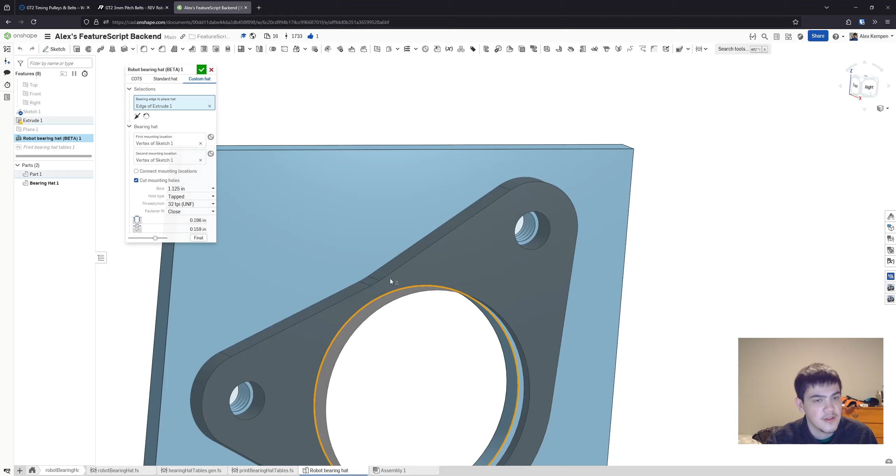So the goal today is to get this fully finished, polished, and ready for release. I would imagine I'll get feedback, because there's always more things you can do and things that can change. I could totally see people asking to configure the diameter of this fillet, or change the wall thickness or things like that. But I think it's easier for now to just release it, and then people can give feedback and we can make changes later as needed.

So the main things I want to do today: final code cleanup. I realized right now this doesn't support tapped holes, which is a little goofy, for sure. So I'll probably try to clean that up as well, and take another look at my standard library hole implementation, making sure I'm doing that correctly and everything is logical and sensical there.

Since the last video, which was like a week and a half ago, I've done some other work with my lookup table module, getting it ready for changes. I've been wanting to use more lookup tables across all of my features, so I've been tweaking the API a little bit and making some changes.

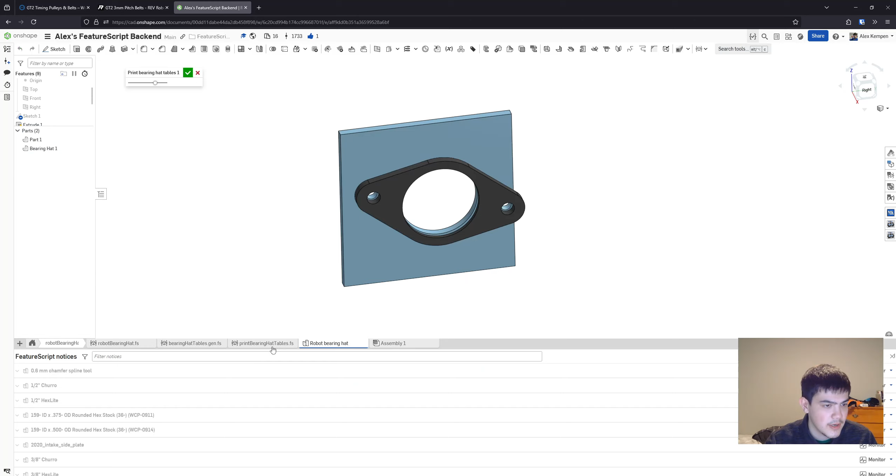Nothing too big. The biggest thing is I added support for basically printing an entire studio. So the generated code now looks, let's see here - if you open this up, the code it prints now includes the FeatureScript version, so it's the full FeatureScript studio. That way you just copy and paste it into an entire studio, and it has the automatically generated file.

That's very similar to the Onshape standard library, how they're generating a lot of their files, although they're obviously not doing it by printing in FeatureScript and copying and pasting. They have an external tool. They do that with all of their enums and things, where it's being generated in code somewhere else, and then they're importing it into the standard library rather than typing them out by hand.

The other change I've made is I used to have that bore type enum - I believe these were specifying the bore type, and then down here inside robot bearing hat there was this get bore values function, which took a bore type as an argument and did a switch statement off of it to get the bore diameter and these values. Now instead we're adding it, defining it relative to the original bore diameter.

You could also, of course, just put outer diameter and C-bore diameter inside the bearing, the bore value as well - you just add them here, and you'd have access to them immediately. So those would both be perfectly fine ways of implementing this feature. It's just what I chose to do while I was developing this.

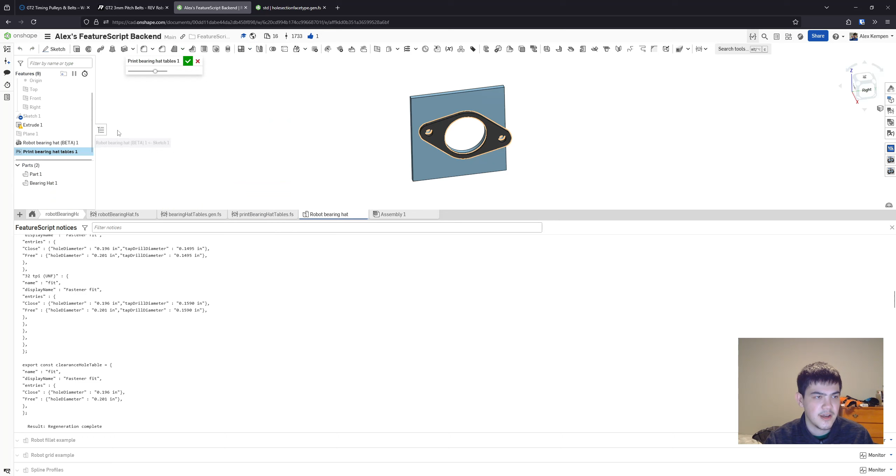But this is just what I'm doing for now. I'm kind of erring on the side of being a little more opinionated, not exposing every option under the sun. If users ask, I can always go back and look at that again. So that's really been the only major code change I've done.

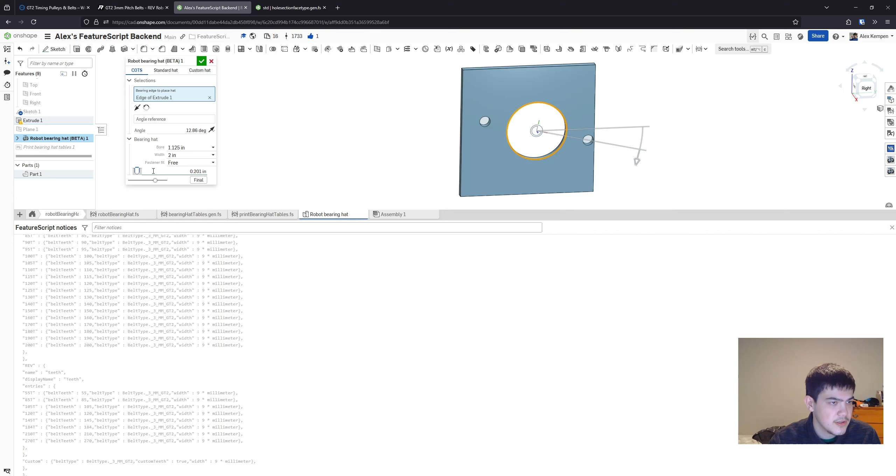So now let's take a look at our last thing here. Currently, I realize after the fact, this doesn't support the tapped holes. I think we actually need another table. Let me look at this again just to refresh my memory a little bit. So we have a bearing hat table or bore table, let's see here.

So this is bore and width - bore, and then you have your width nodes as well. And then otherwise you just have your bore, and then you have a hole, and then there's a clearance hole. So we would just want to update this clearance hole table. Let me make sure this clearance hole table is only used...

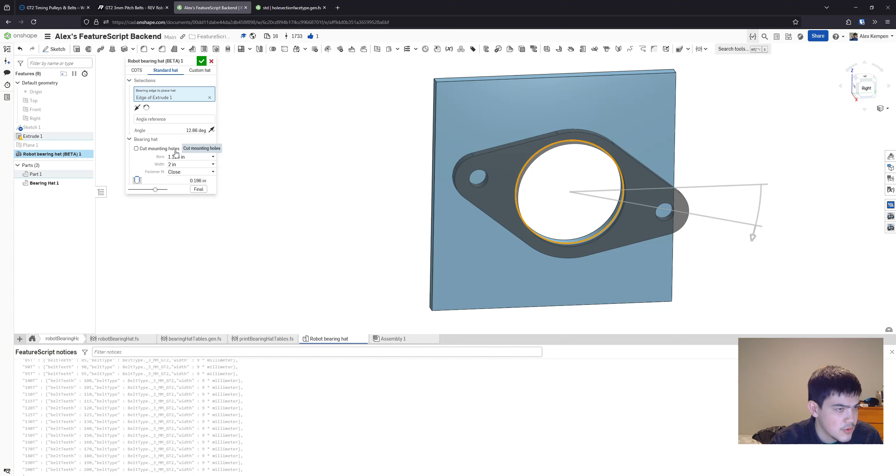Hole table. Let's see when this is being used: use clearance table, which is when it's a COTS, or it's not COTS and we're cutting mounting holes. In the not-COTS case, when we're not cutting mounting holes, you only want the free fit because it's just the hat. So I will need a third lookup table to handle the COTS case, it looks like, which is a little annoying.

If I had realized that last episode, I almost certainly... well, I don't know. There's a lot of things if I had realized I wouldn't have done all of this. But 'in for a penny, in for a pound' has kind of been my catchphrase for the past couple of videos, which is really biting me. But yeah, we'll just go ahead and do it, I guess. It'd be crass to cut it all out now. What have I done? Okay.

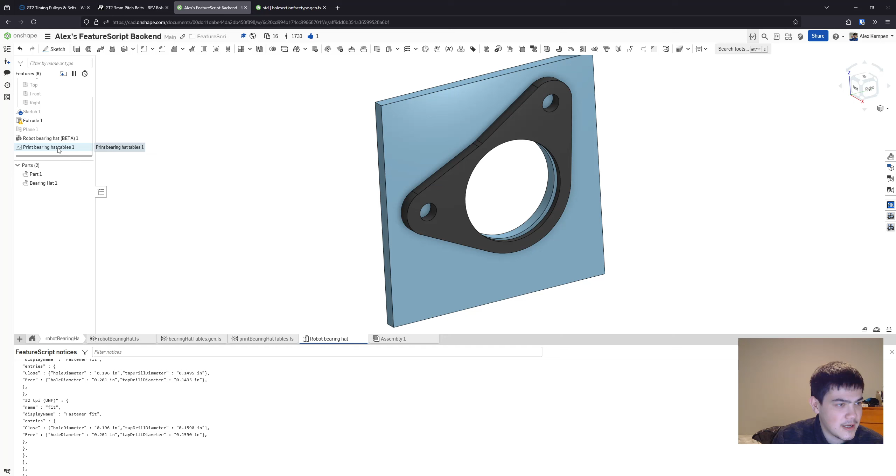So one weird thing with this that I don't love is the Onshape hole tool. They've updated it, and this is something I might have realized but didn't fully internalize. When you're doing a simple hole like this and you're not going through, you don't have a fastener fit. Because if you do have a fastener fit, then it expects a clearance and a tapped hole, and so it complains.

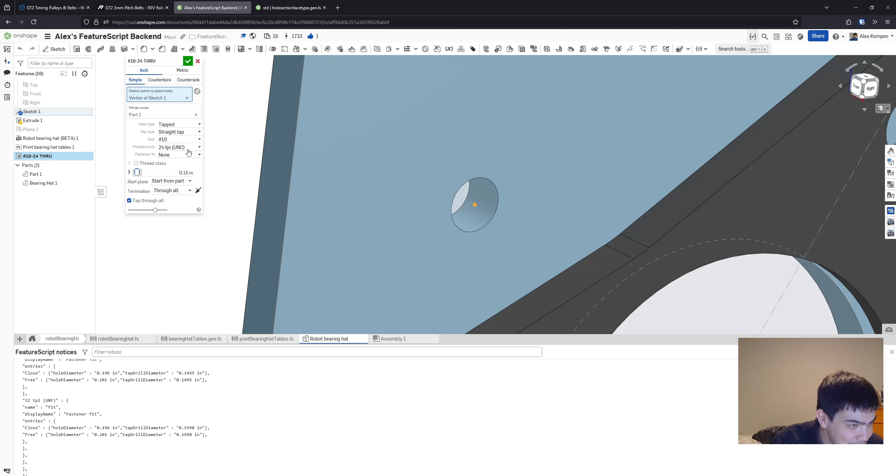So the fastener fit—the weird thing here is, this is a tapped hole, right? Is this a tapped hole? Oh, it's not a tapped hole. Wait, that's so goofy. You set it to tap, you have a straight tap, you set your threads per inch, but then it's just not a tapped hole because you can't make a tapped hole unless you're going through two parts. Wait, that's... okay, that's actually genuinely not great.

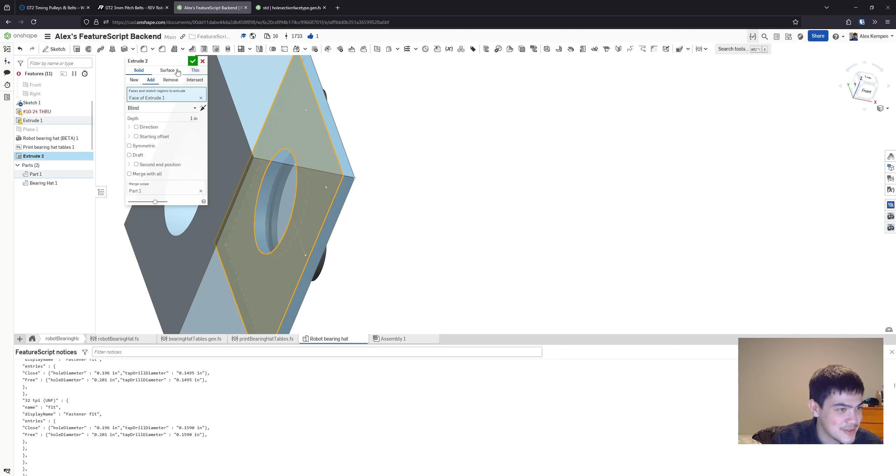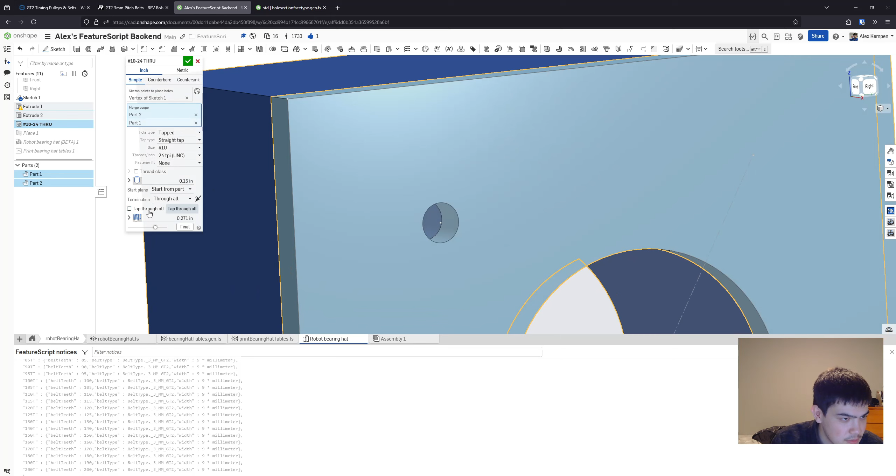Wow, that's pretty bad. Let's just test that real quick. I'll make another extrude here, and then we'll test with our hole. So, well, there's this tap-through-all option, or is this just a weird implementation? So we set our merge scope—oh, that's if you want a partial depth tap. So here, this is still a clearance hole.

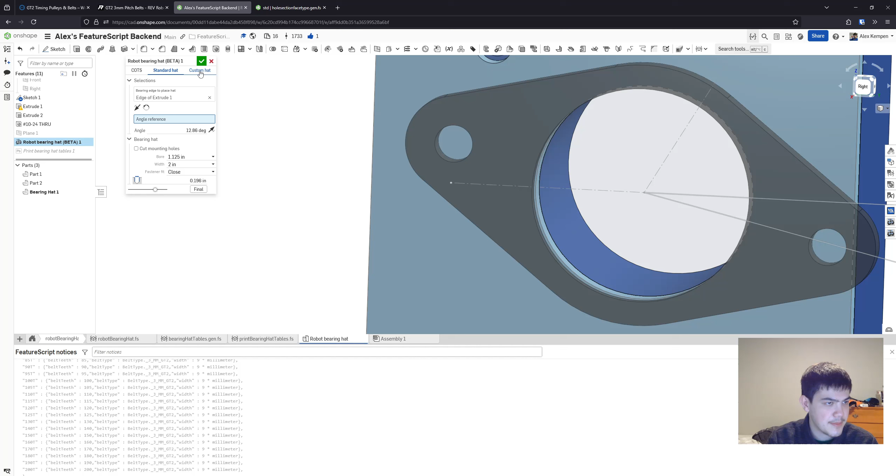And if I set this to close—wait, what? Oh, I don't get it. Okay, sorry, I got confused there because I saw my feature was producing the cosmetic threads. When you do a tapped hole, it's like here—if I set this like this and then make it tapped, I get the cosmetic threads. So I would assume Onshape would also create the cosmetic threads.

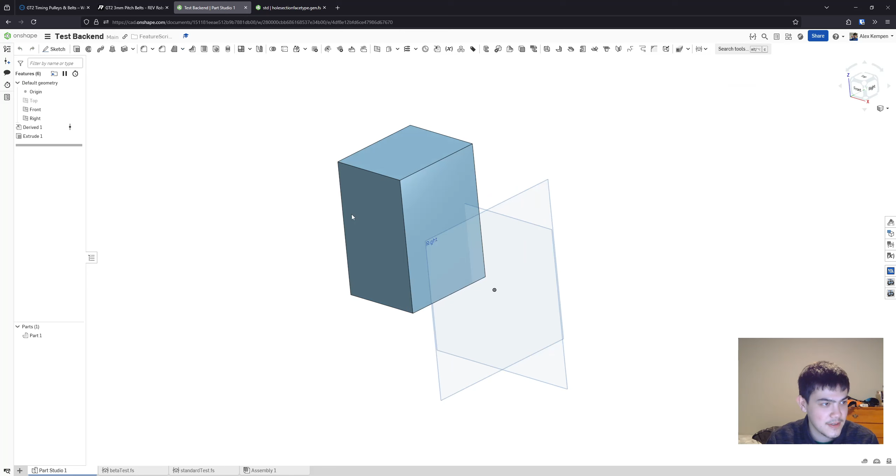But I realized I forgot this document hasn't been updated to the latest version of the Onshape standard library, because that's a relatively new feature, so I don't get to see them. The reason my feature is okay is because I keep my FeatureScript version up to date, using my Robot Manager app—this one over here, which you can get from the App Store for free. It has an action that updates all your feature studios to the latest version automatically. I run that every once in a while to keep documents up to date and keep versions the same, because sometimes, especially when importing from the standard library or copying and pasting code, a version desync will give you errors, which is very annoying.

Anyway, I'm just going to make a test document really quickly, so I have a document on the latest standard library version, just so I can see the behavior for sure. All right, pop one of these, grab a point, extrude. Yep, and then I'll extrude it again.

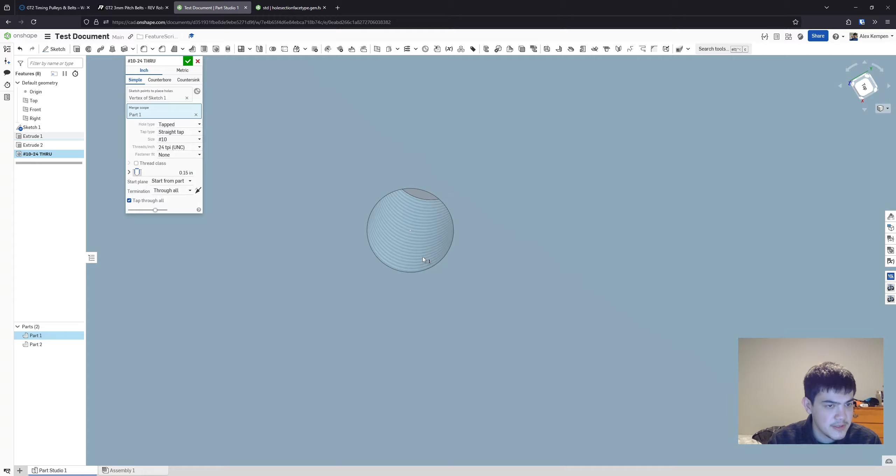New, please. Okay, so if we hit it with a hole feature, yeah, there we see the cosmetic threads. And if I make this a none, yeah, so that's the behavior. The goofy thing with this is this is the hole diameter option, not the tapped hole diameter option, which is strange. That's a little goofy, for sure. That's definitely not what I would expect. But, you know, it's how they implemented it.

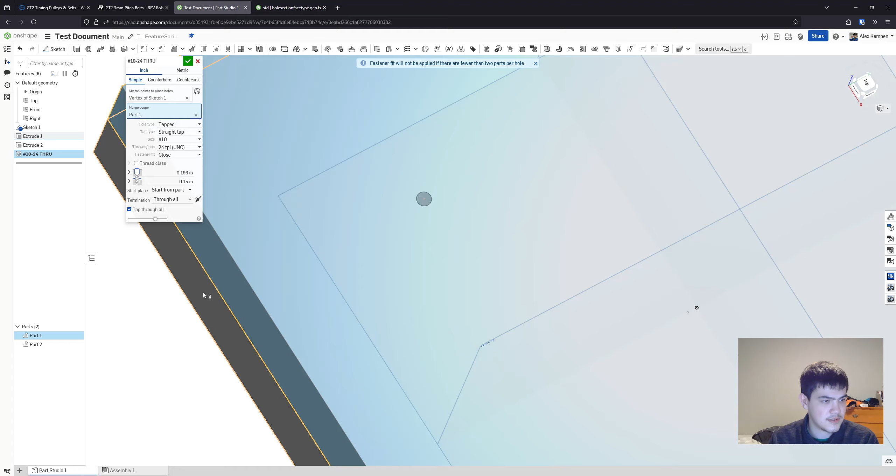Yeah, so if you have a single one, you're only going through a single part and just doing like a regular tapped hole. You don't get the tapped option. You just have the hole diameter. Because, of course, in this situation, I would expect to see this one, and the clearance to go away. But instead, you get the clearance, and it doesn't go away. So it's very strange behavior. I don't know. That's just how Onshape has decided to implement it.

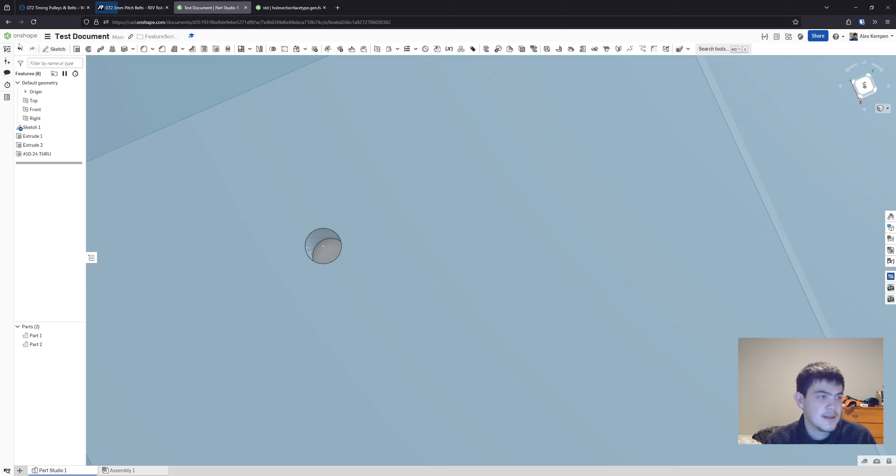And so I'm debating, because I could try showing it and then redirecting to the clearance hole in the back end so everything works out correctly. I don't know what to do. I guess I'll probably stick with what Onshape has to be consistent with the standard library and match their behavior. But I do think it's goofy, and I definitely don't like it. So wag my finger a little bit, but it is what it is. Okay. So that's fine.

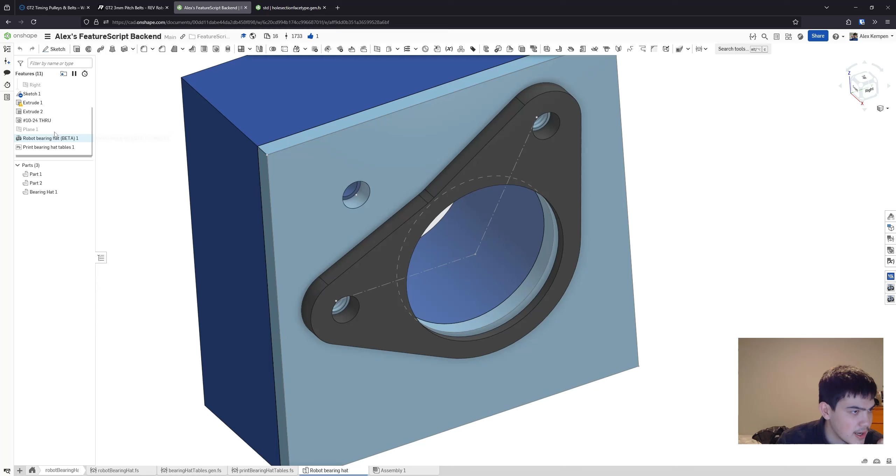Okay, so we need to do a, what is my hole table actually? Is that just what I need? Clearance, tapped, and then fit or thread? Yeah, although, let's see, the problem there is just we're showing the extra parameter. Does it actually have too much UI? So for a simple tapped hole, I would expect not to have a fastener fit, right? Because you don't have a fastener fit for thread tapping. You just have your 24, 32, UNC and UNF.

Okay, so I'll need a version of this. Const single tapped. Yeah, okay, so I just need this, and then I just need this guy here, right? And actually I'm thinking now, I bet I can use some of my new set next utilities, because I just need a thread node without the fits added, right? So I just need this option here and then terminating here, so I need the nodes up to here basically. So let's try and get that.

So what I'm gonna do is I'm gonna make my hole node. Or wait, hold on, what's going on? So I have my fit node, which allows me, yeah, so I still need hole type. Okay, so let's do const single hole node equals hole node, right? And so this will create a copy actually, because in Onshape, some languages have the concept of mutation. Actually, Onshape does support it a little bit, right?

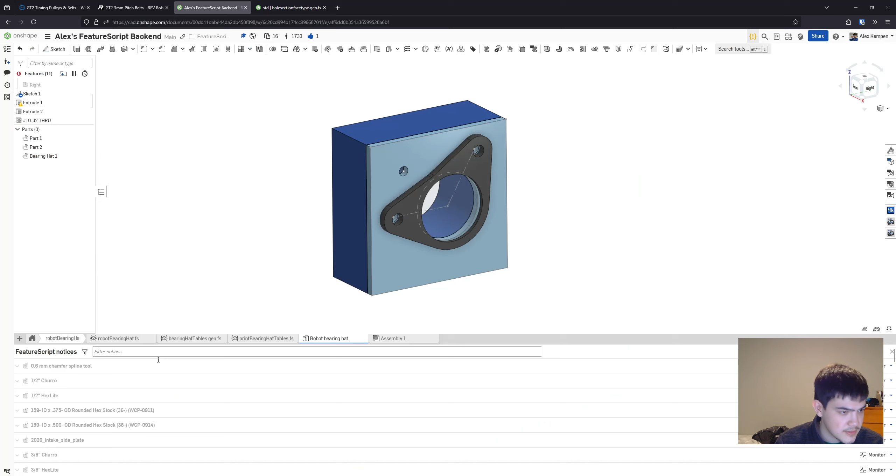Yeah, so if we go look at the code now. Oh, it's erroring. It's not regenerating properly. That's not amazing. Lookup value. Oh, right. I don't have an overload for just the name, so I'll make that real quick, because value is optional. Yeah, and it auto-completes. And you'll notice I've updated this a little bit so that they now take more maps as parameters, just because maps are a little more variable. Although for lookup value, I found I like having the overloads broken out because it makes the syntax a little more concise.

So just to recap, we have our hole node, the clearance option will always map to the fit node, so that'll build out your close to free option. But then tapped, here we're mapping tap to the thread node, so that's getting added on. So this option here, when we call that, will become the thread node, and the other one, we're mapping tapped to our single hole thread node, so we get our different nodes depending on which table we're building.

And so if we look down here, we can see we have our standard hole table. Here tapped builds out into our pitch, and then we have our fits on top of that. And if we look down here at our single hole table, hole type, clearance, and then tapped gets built out into just our pitch. So we don't have the thread fits there. Yeah. So that works, and it's probably sufficient.

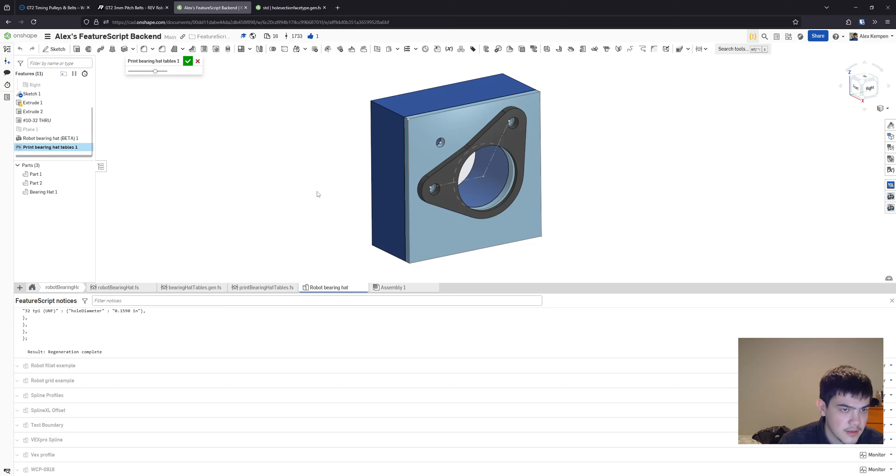Nice. And then we make sure this is copying correctly. If the path changes, we get the lookup info. Has clearance is always just going to look at whether we're tapped or not. And then hole diameter, we get that. Yeah, it always expects a hole diameter, and then if we have a tap drill diameter, that also gets set. And so here we just have the hole diameter, so it won't set that. So theoretically, this just works.

Let's take a look. So COTS, right? This is the one we changed. So we see we now have our tapped holes. And we see it's complaining about parameters that have been overridden, right? But I do see my tapped hole, so we're happy with that. And then I do see my tap drill is still here, which is not right. That's not updating. Okay, use clearance tables with one argument is not found. So that's not right.

Get active path. What is this used for? It's just used for the editing logic. Yeah, I don't love this function because it's already done here, right? I guess we'll just do this. Path equals get dot path. Yeah, we can just do that. Right, and this also gets the table, which is slightly inefficient, but like whatever, it's editing logic. It's not like a performance problem at all.

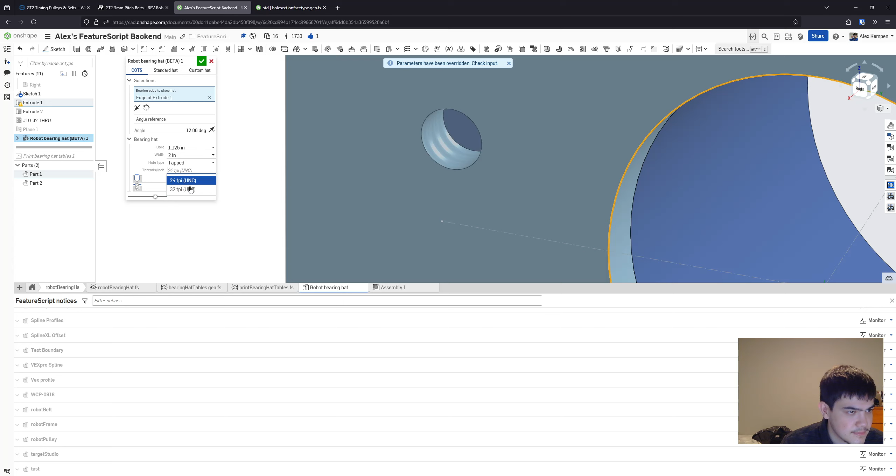Yeah, so if you change this now, that does that, which is good. So it updates that as we want. And the hole is still tapped. Okay, and then we come over here, right? We can do our fastener fit. That still works. And then we can change our tapped as well. And if we don't cut the mounting hole, we get close or free, which is correct.

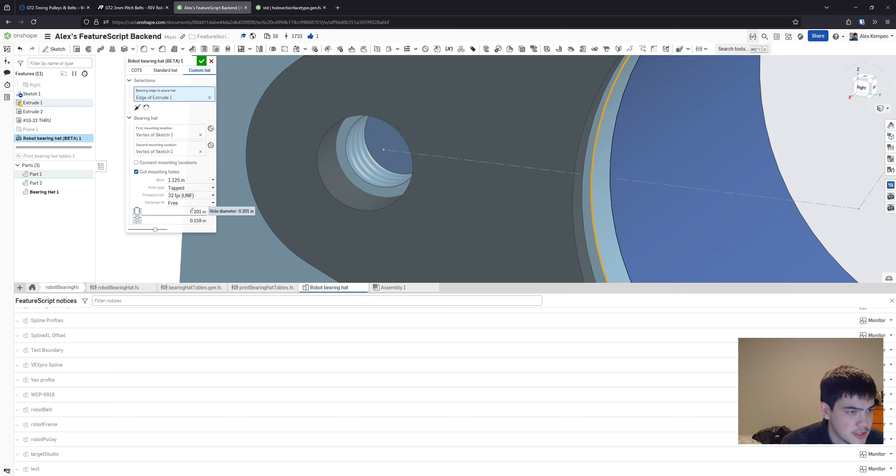Nice. And then here, right, same thing, I would imagine. Don't cut mounting holes, you get close or free. If you do cut mounting holes, you get your tapped options, and that all appears to be working. Cool. Yeah, so this appears to be right. 24. Yeah, is that right? Smaller, bigger. I'm noticing the diameter changes. 0.1495, 0.159. Let's see here.

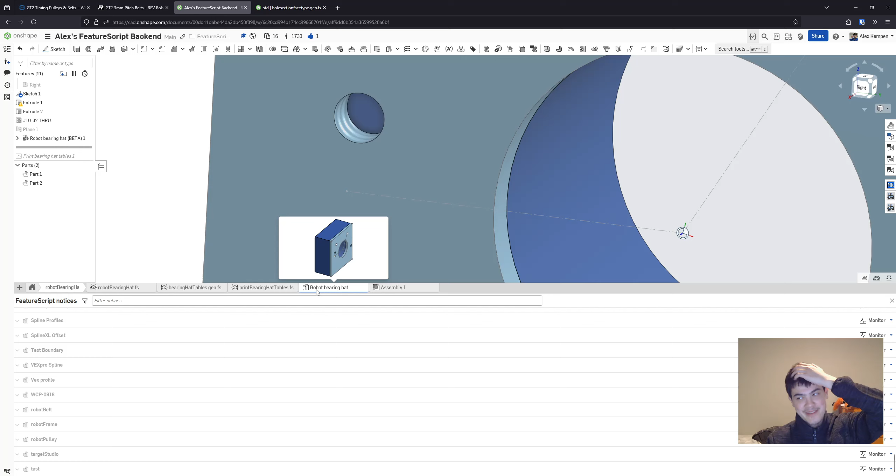Okay, yeah, so it's still using the tap drill diameter. And if that's the case, then... Okay, if you're just going to use the tap drill diameter, then maybe we should just use the tap drill diameter. Is what I'm thinking. You know? And we'll just say... Because at this point, it's just too easy to use that, I think. Well... Let me think. Or well, let me actually look at my logic, I guess.

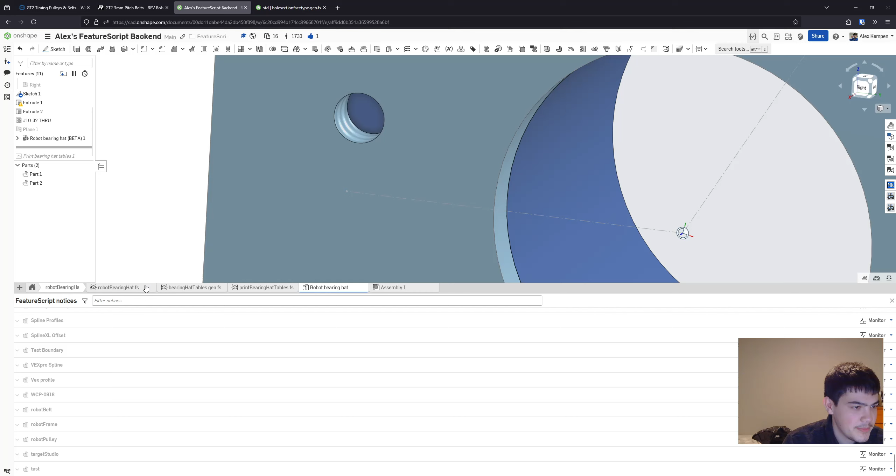So yeah, so has clearance is not getting set correctly. So it is a tapped hole, so it shouldn't have a clearance. Oh, I guess I suppose I see why it is easier.

Do I want to do that? I mean, this could just be getHoleLookupInfo(path). Although this will do weird things if... we'll just roll with it. It's fine, it doesn't matter. I was just thinking if you store the call, then technically you can avoid having to run the lookup hole info twice, right? Because it gets called once in here, and then if it passes, it gets called again immediately, which is a little goofy. But I like this pattern of just checking, so I'm not gonna worry about it.

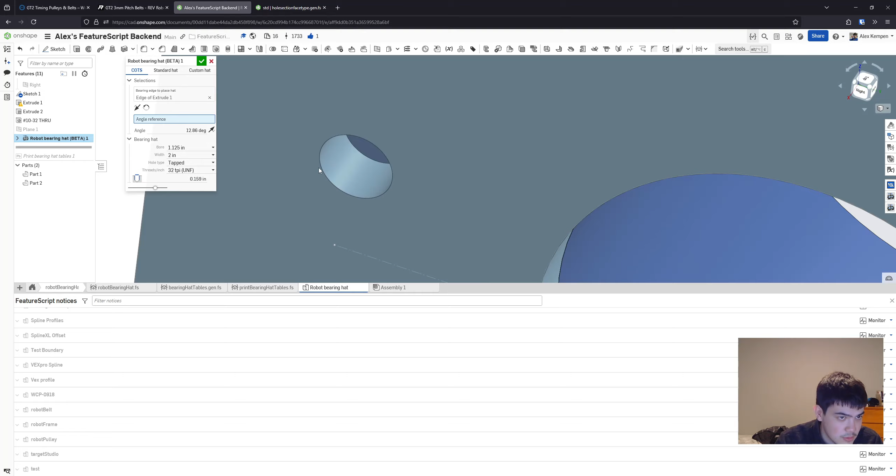So now when we change to COTS, we get that, and that happens regardless of clearance or tapped, and then if we come back, it updates properly. So that's good, we like that. Okay, and then, oh, I see, so this is not a tapped hole currently, probably because it's using that is tapped. Really?

Okay. Well, yeah, because the thing is, if I wanted to hide the hole diameter and show the tap diameter, I would need another parameter to handle that, right? And then I would have to rebind them properly. And that is a lot of rebinding for my taste. That would be quite a bit. So path.size equals number 10, path type is straight tap.

Okay, yeah, so I wanted to update this to go through both faces. So I'll go ahead and start doing that. Basically I want to have one hole operation that cuts both holes, because the hole obviously supports that. As opposed to sketching the mounting holes and extruding them through one and then using the hole tool for the other. If you're gonna use the hole tool, you may as well use it for both.

So that means here, right? Here is where we extrude. We create the bearing hat base and then we sketch out the mounting hole faces and cut them. Actually, I'll just delete this code because I know I won't need it. I could cut the bearing hole using hole as well, but this is just easier. And people shouldn't need attributes for that because it's a big counterbore anyway.

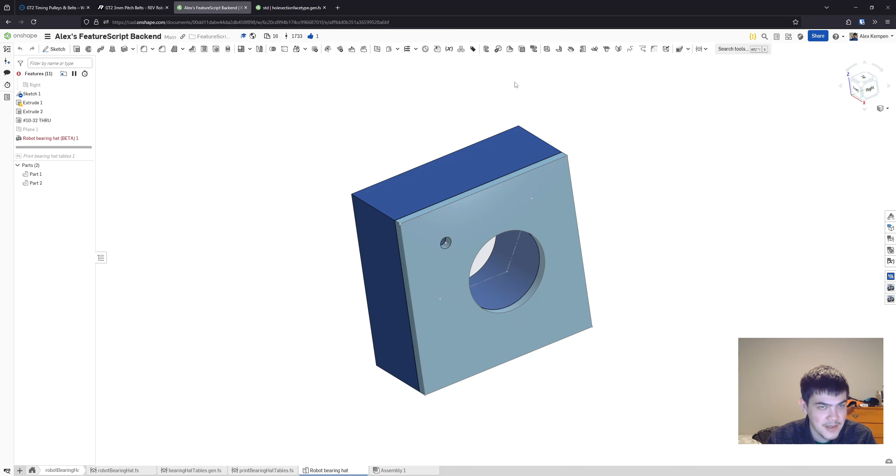And then tap drill diameter is always going to be the tap drill diameter. And then major diameter is just chilling there. I suspect major diameter just doesn't need to be set, or it can be set to an arbitrary value as long as it's present, because Onshape just has a bug in their API. But one thing at a time.

Okay, so we did that. Yep, so we added parameters. What did I add? Circle plane and I think locations. Yeah, it looks like I usually pass circle plane before locations, so that's probably the correct order.

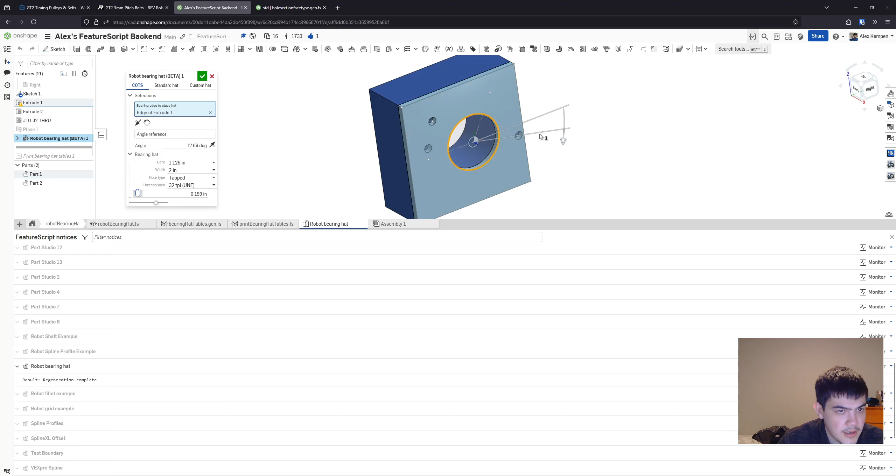Okay, let's see what we got. So we got our standard hole. It's complaining about parameters being overridden, which is not amazing, but one thing at a time. So custom hole.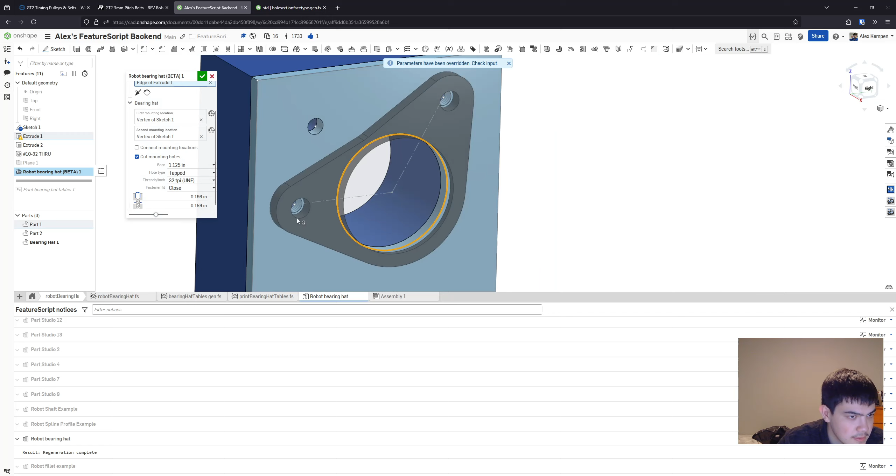Okay, let's actually verify. So if my fit changes, that works. If I change to this, that works. And if I do a clearance hole, that goes through both, and it's close, and it's free. Okay, so that works, and it's the same for standard hat and custom hat.

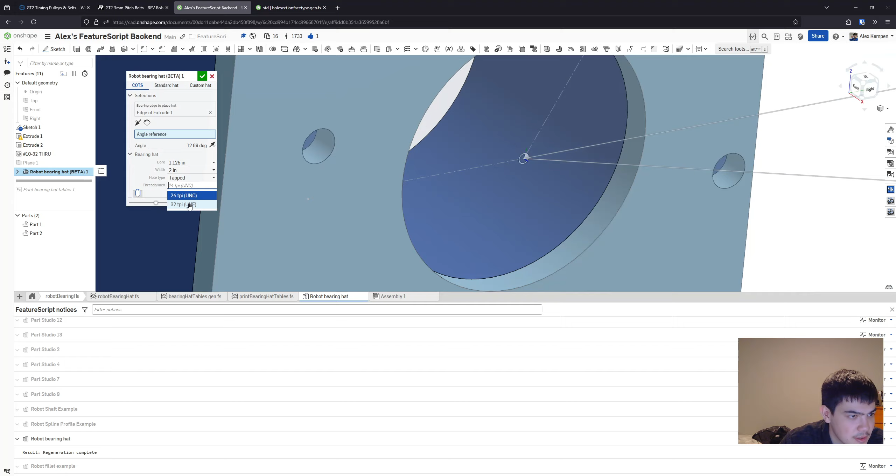And then COTS, if I do a clearance hole, I can do close or free. And if I do a tapped hole, I can do tapped or clearance. Although it's not actually getting marked as tapped, so that's not good. So we need to fix that part.

So let's see what we got. Mounting holes. Okay, so I assume this is a problem with this. Should also be checking attributes, I suppose. I'll do that shortly here. Has clearance. This might be wrong here.

Path that fit. Oh yeah, so if it's going through multiple parts, yeah, so it's going through multiple parts when you have a bearing hat and we're also cutting mounting holes. Right, I don't actually need, well, I'll keep this for a second, but I don't think I need it. Technically you have multiple parts if we ever allowed the scope to cut through multiple things, but like one thing at a time.

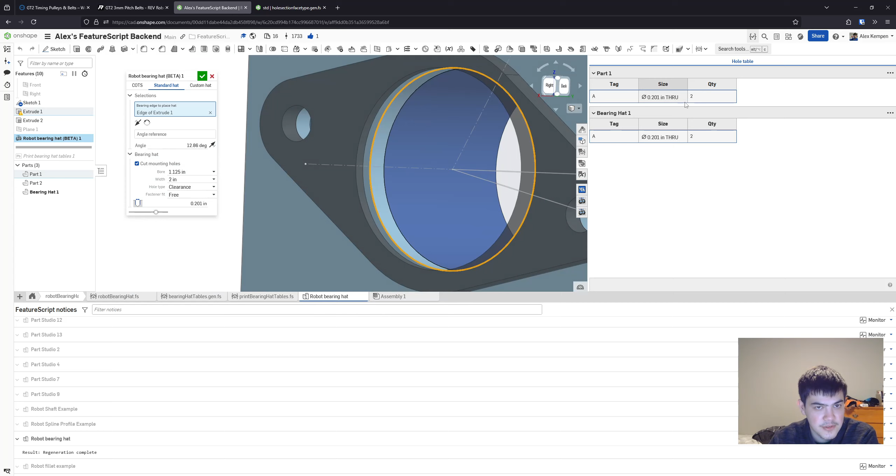Okay, so it's still not tapped, so that's not amazing. Let's verify this, I guess. So let's check our hole table. Okay, and I'll get rid of this just so I don't have conflicting UI. Okay, so yeah, so we got our holes, right, which is cool. So those are both 0.201 right now, which is fine. Now I make them close, that works.

Okay, so now if we make them tapped, okay, it is not having a good time. That's not what you love to see. Table title, oh boy. Okay, so we're getting an if statement. Condition must be Boolean, it's undefined. So let's take a look.

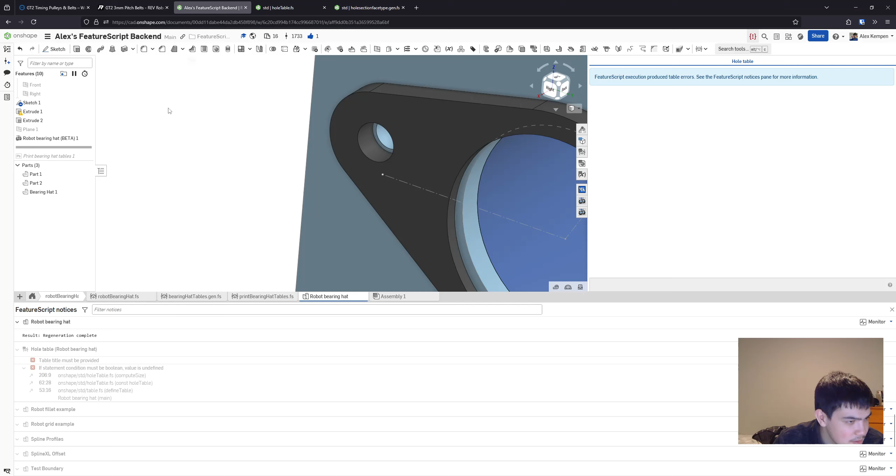Is tapped through. Okay, so it's not really. What line? 206? Okay, yeah, so it's complaining its tap through is not set, which is a little surprising for sure.

Must be Boolean, value is undefined. Okay, is there an is tapped through? Okay, so just like that, we're back to like checking through v2. No. Oh boy.

Okay, there is only one is tap through parameter. Because we definitely don't want to have to set all of these things, that's for sure. Because my life is too short. And I will cry. Tip angle style. Okay, so it is being set, right? Like it's being passed.

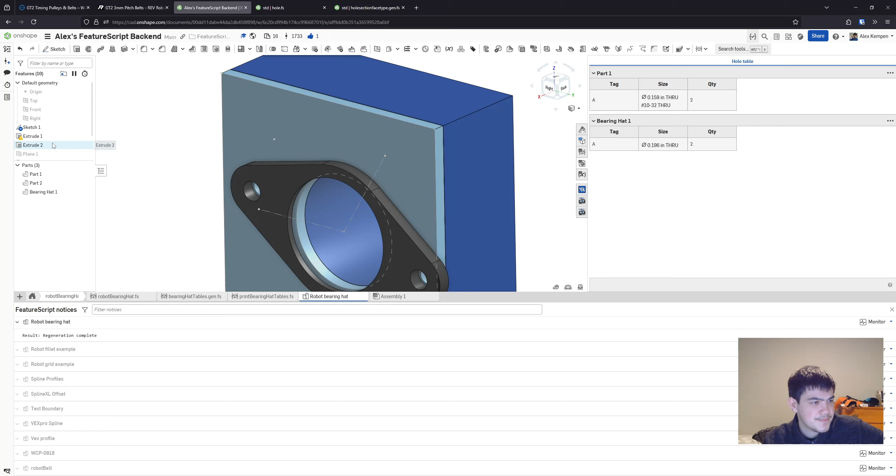Let's try this. Okay, so that brings us back to that. Fit is wrong, really? Why can't I pass a fit? I mean, these attributes are correct, right?

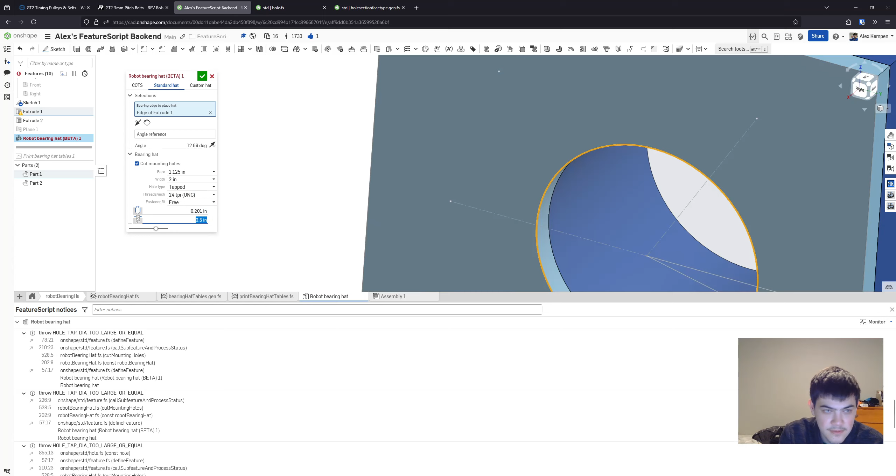Which makes me want to conclude, right, and if I do like 0.5, whoop, 0.15, sorry. Right, so that works, right. So like that part is all fine. Parameters has been overridden is obviously wrong, but one thing at a time, right?

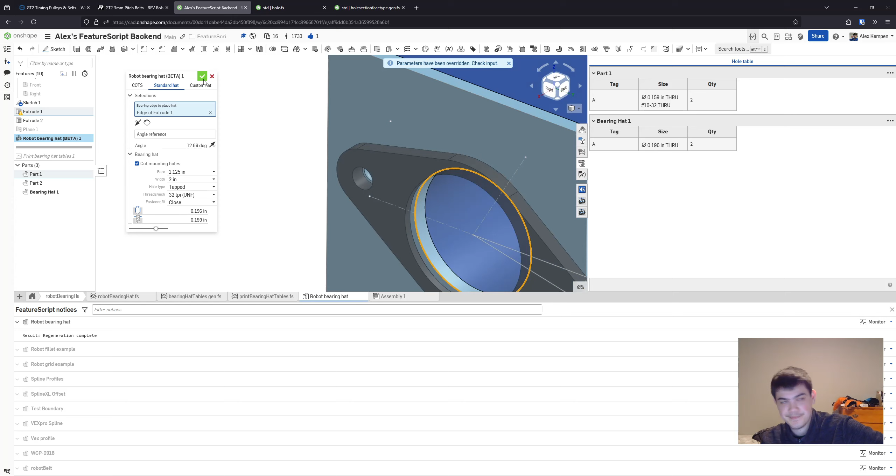Okay, so that's surprising, or I mean that just works, right? So I might have been wrong about the fit needing to be set to none, or maybe it just doesn't matter. Right, and so here we're not setting like the hole attributes, I think, is the problem. So...

Yeah, so has clearance will be false. Will be false when you have multiple parts. Let's see here. So this is wrong when...

Yeah, so there's times where you have where you don't have clearance, but it's not tapped, because has clearance is being used to hide and show that tap parameter. So this is wrong. And so we should not be setting it to tapped if we're using a single hole table. Else if use single hole table. And really we should be checking if the path is tapped.

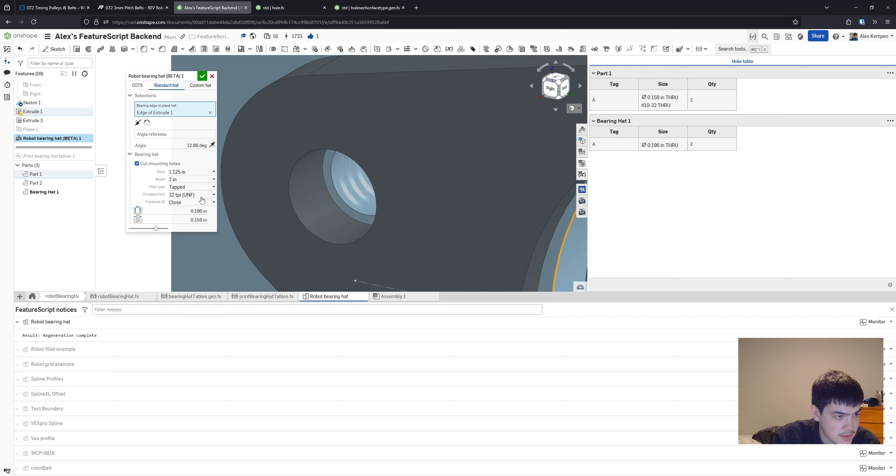Okay, so then we can do our standard hole. So I see that is correct. Right, we can change that. We can change that. Everything seems to be updating correctly. All right, if I change to clearance, I get a clearance hole, and I can

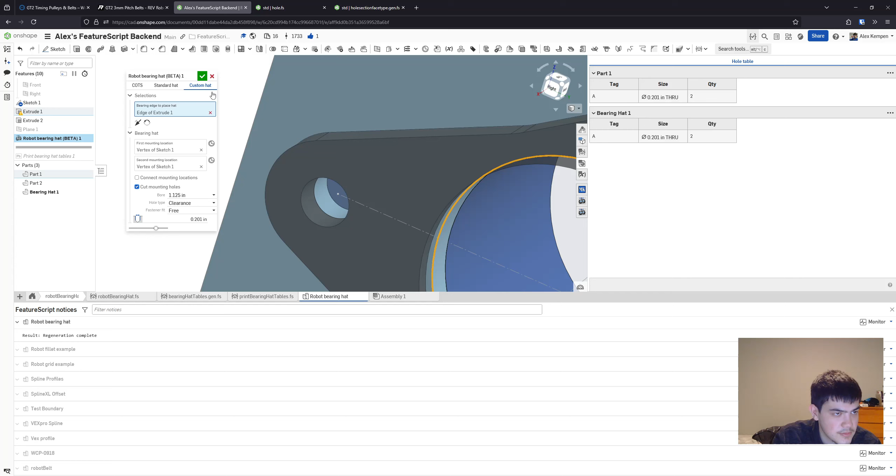still change the fits. Okay, if I don't have a mounting hole, I still have a mounting hole, which is wrong. Okay, yeah, because if we're not cutting the mounting holes, I'm still passing the scope, so we need to fix that.

Okay, so I'm going to rename this the generic hole scope, because I don't feel like passing in the bearing hat separate from the hole scope, because sometimes the bearing hat is not defined. So I'm just going to specify that. And then cut mounting holes, right.

Question mark bearing hat. Well, let's see here. So if it's not a COTS hat, right, we're going to have... and technically this could just be bearing hat, right? Because if we have a bearing hat, we're always going to cut it. And then if definition dot has mounting holes or cut mounting holes, right? And this parameter, of course, only makes sense if we don't have a COTS hat.

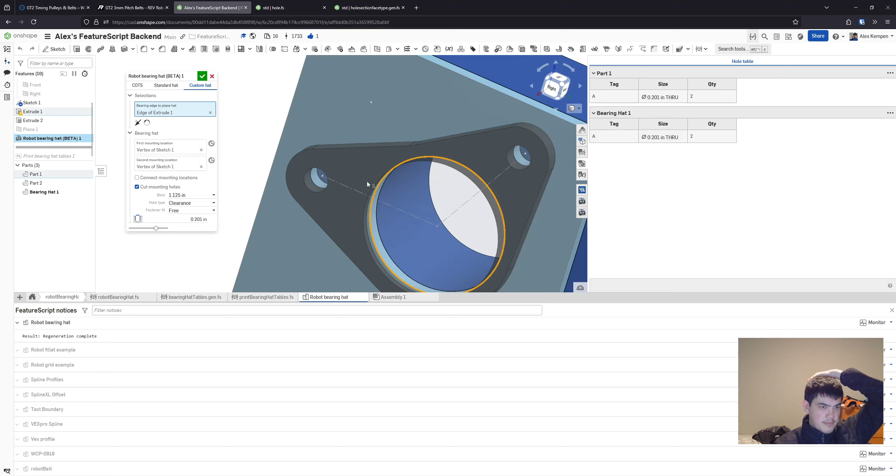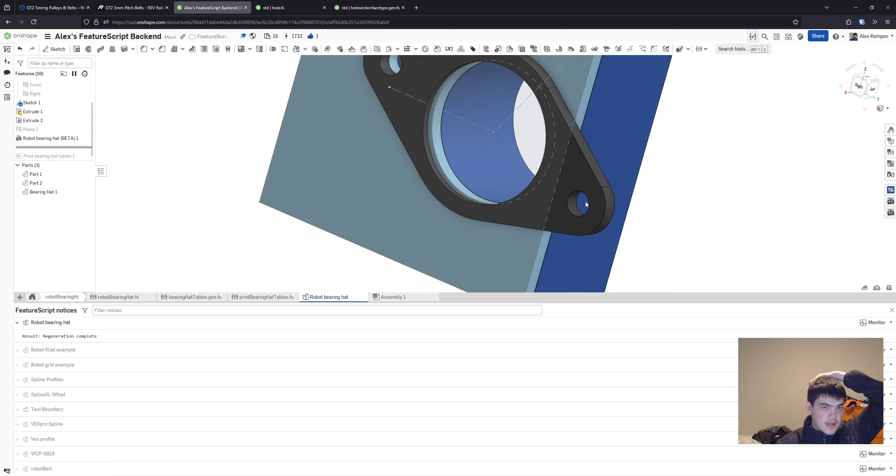Okay, so my only concern with this right now is with this hole scope. I want to make sure it doesn't become vacuously true when you're cutting a mounting hole through the bearing hat. Because, for example, if you had this too close to the edge, where it's not cutting the mounting hole, the hole feature is happy, even though we're not cutting through that, because it's cutting through the bearing hole, so it's always going to find something to cut through, which is not amazing.

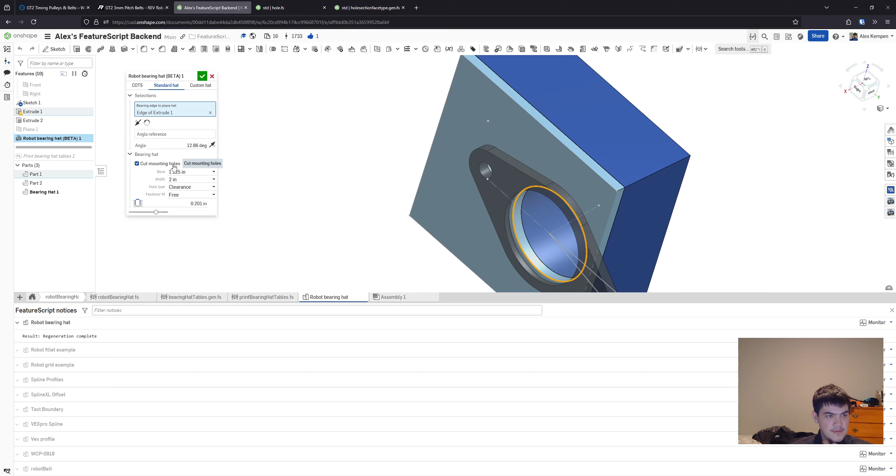Although, when I think about it, I don't really care. Although I don't love it, because you could imagine a situation where you're not cutting either mounting hole, and so you're telling it to cut the mounting holes, but it's not. And that should be an error, but it won't be, because the scope will include something at least.

Unfortunately, there isn't really a way to fix it without just having two features, or having the hole feature run twice - one that just cuts the mounting holes, and one that cuts the holes in the bearing hat, like we were doing before. So that's not amazing. We could go back to the way we're doing it.

And not have the hole attributes. How's performance? It's about fine, yeah, that's fine. 50 milliseconds is about par for the course for features.

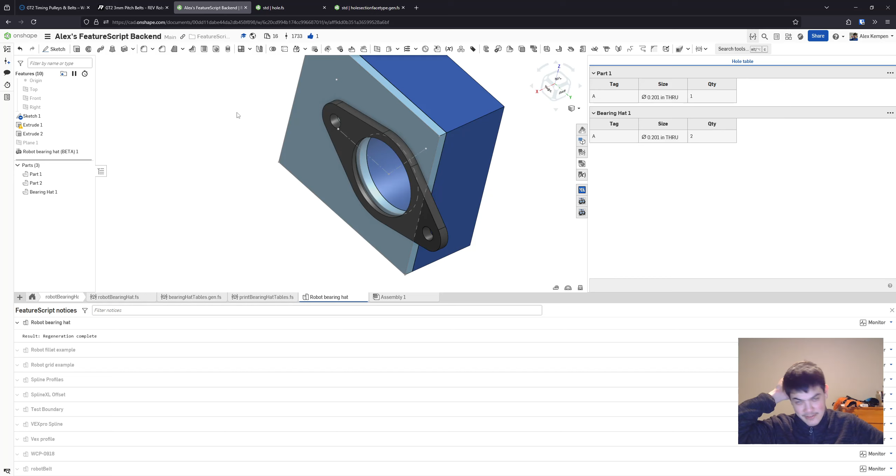I mean, because the bearing hats will always be 3D printed, so you don't really need the hole attributes. Someone could conceivably machine them, but whatever - and if you're machining them, you don't need the hole attributes, for goodness sake.

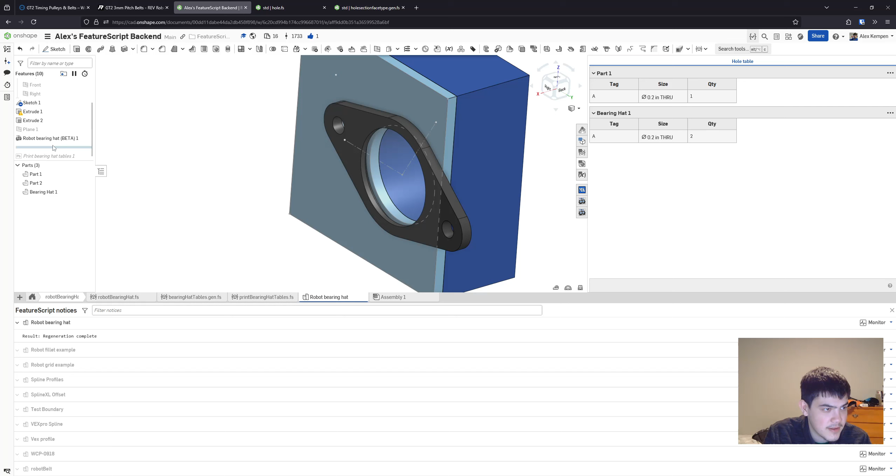Yeah, I'm not thrilled. Let's see, how is this working? So if I do like 0.2 now, okay, but that's using my error - feature info. So I should be able to just not have that check, because it should do it for me, and it doesn't. And I wonder if that's because...

That's a V2 versus V1 issue. So I make that hole diameter - I'm going to leave that as hole diameter, but I'm going to try mapping it, and seeing if that maps it, well, if it's not throwing the warning, it won't. Let's see here, hole diameter V2. That should work. It should detect the discrepancy between what the lookup table is saying and what the user has said.

So surprising that's not working. I need to make a decision about how I want to actually do that, because if we are going to do the two hole table thing - I definitely don't want to call the hole feature twice, because that's annoying and cringe. But I could go back to how I was doing it before. I wish I'd thought about it a little more before embarking on this grand adventure. But that's life.

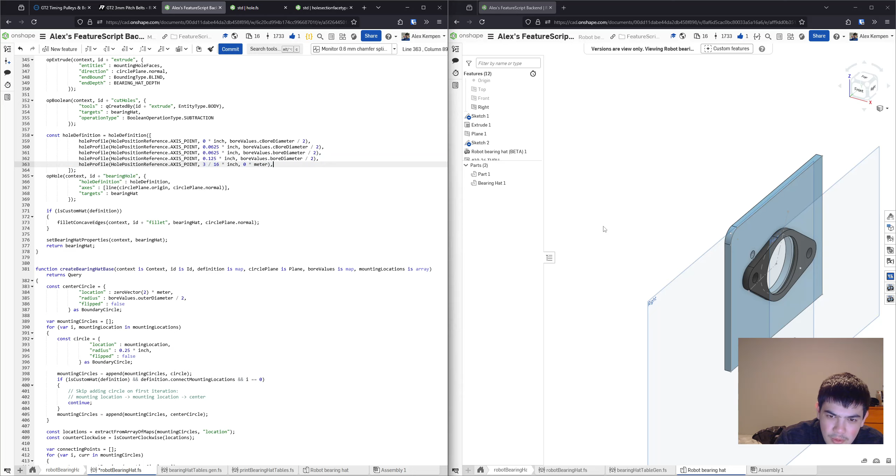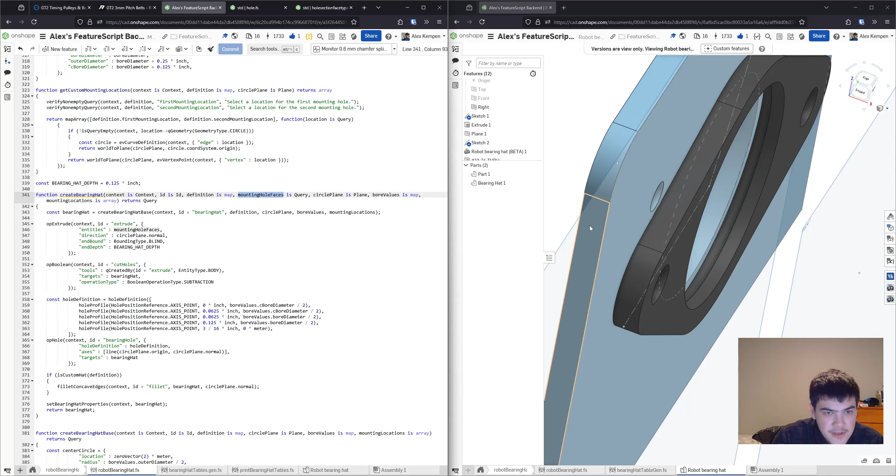Oh yeah, because you need an axis. Yeah. Okay, yeah, because holes have to have a tip on them. Okay, so this is bearing hat depth - hat depth, okay, yeah, so mounting hole faces. That'll be down here.

Okay, and then we'll come up here and we'll grab... yeah, is this really what I want to do? I guess so. Yeah. I don't know. I did like how it was cleaning up the code, but I don't know. I do think from the user perspective, it's nicer to have it a little more streamlined. And I think it's technically more performant this way. Maybe. Maybe not. I don't know.

Mounting hole faces, circle, plane, bore values, mounting locations. And that query wasn't even getting used, but that's fine. Yeah, so we don't need that. So this will just be scope, and holes, right? Okay, it looks like get hole diameter is trending towards just being a trivial getter. So we will move. Oh, okay, fine. Well, definition not hole diameter, I guess. Sheesh.

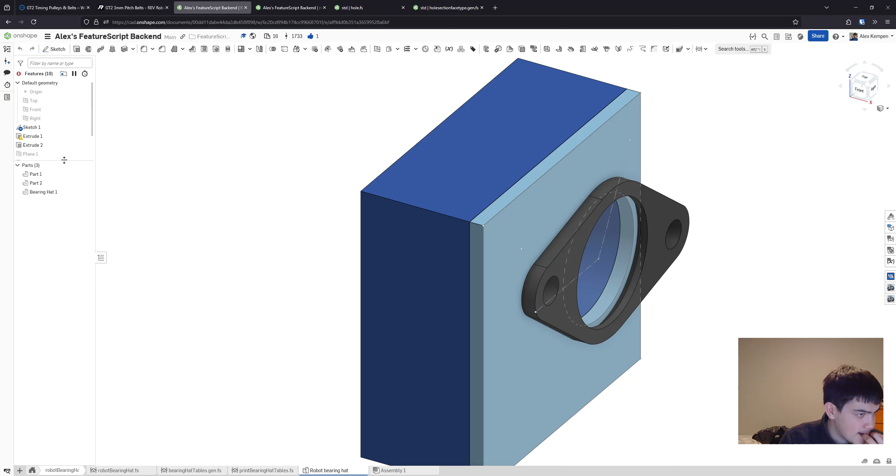Okay, yeah, so now we're getting that, which I actually really like. So, yeah, and then scope, hole scope, I mean, this can just be scope. No. Okay, and then let's make sure this behavior is correct before we go too far.

Okay, so there's a tapped hole. We'll check the hole table. Right, so we're just getting the mounting holes, which I'm fine with, as discussed. 1.5, yep. Close and free, and 32. And then if we do clearance, it's just going to be clearance hole, right, and free, and this is the same thing. If we don't cut the mounting holes, we don't cut the mounting holes, and we don't get, you know, a choice there, which is fine.

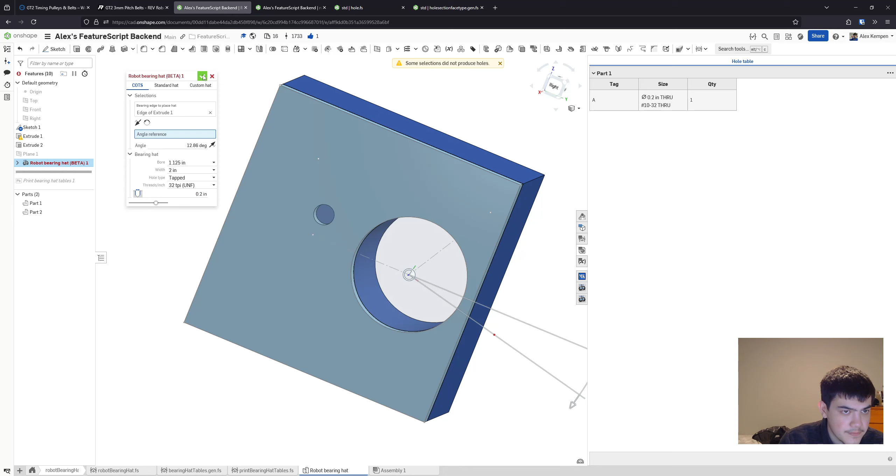And then if we come over here, it's still, you can do tapped holes and you can do clearance holes, and that works. Okay, cool. And then here it's doing the 'some selections do not produce holes', which is correct, but it's not showing the tool, which I don't love. So what's going on with that? Propagate error display is true. Also feature in process status, ID plus hole. Cut mounting holes.

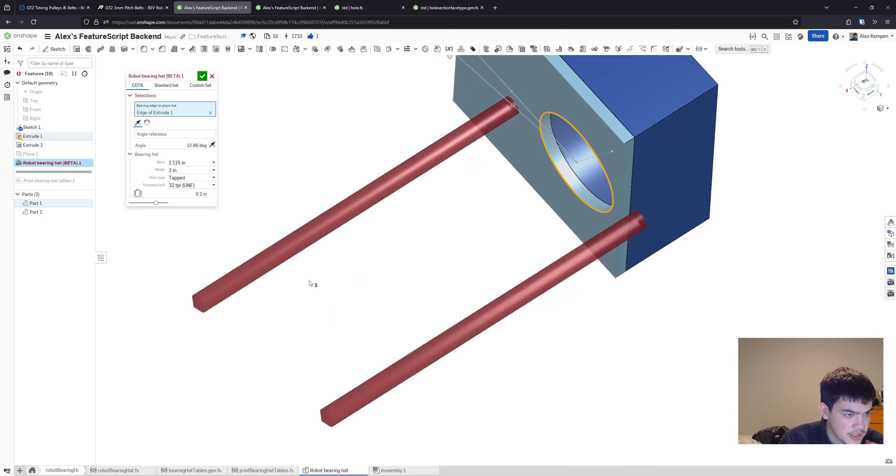Let's make sure it's actually getting the top level ID. It is. That's weird. Oh, maybe that error just doesn't produce holes. Yeah, it just warns. That's just the behavior. So, this part still works, which is good. We like that. This is a very nice error that we're very happy with. And that happens even if you are cutting the mounting holes and you got your direction wrong or whatever, right? You're still gonna get that error, which is good.

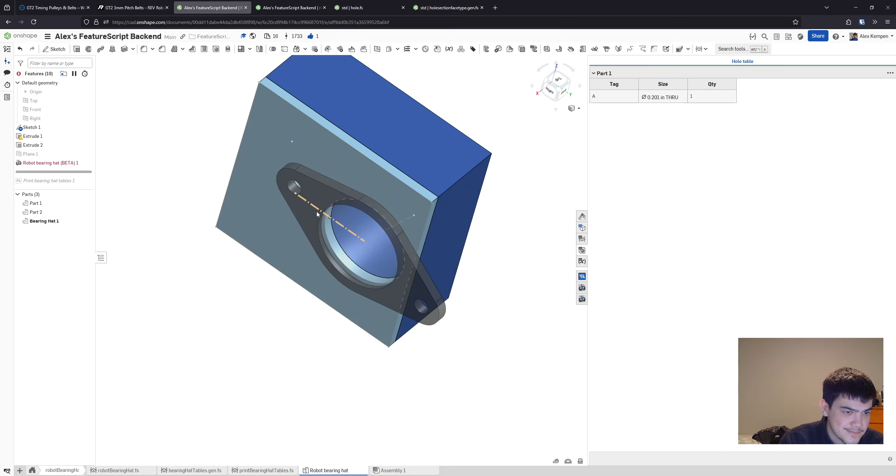And if we really wanted to wild out, you could have the bearing hat be red here, but it's not worth it. Because obviously when you are handling your mounting holes properly, then you get the bearing hat. It doesn't matter. It's clear what's going on. Okay, so that is all correct. We're happy with that. So let's shimmy this over and just look at this.

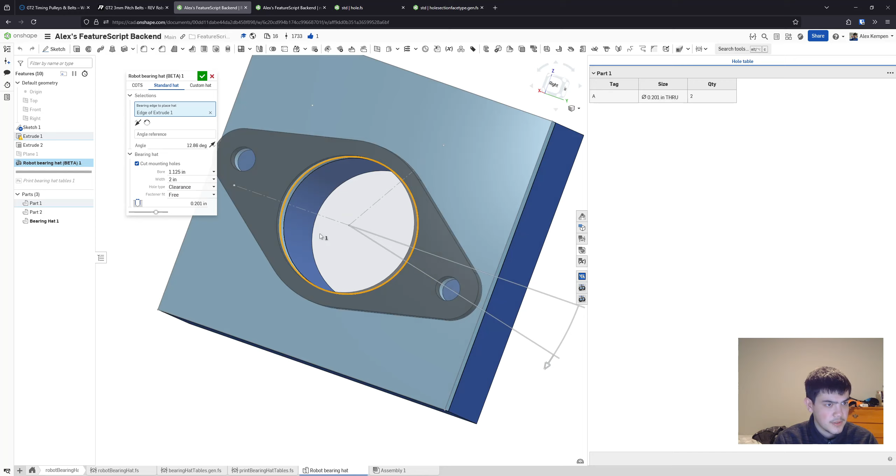So here I just want to check the overridden stuff. So that doesn't work. If I change this to tapped and I do 0.2, so that does work. And so the reason for that is, oh, and that also means this isn't going to work. Yeah, okay, right, because we're not using the hole feature, so we're going to have to do that ourselves, which is fine. Well, it's not amazing because I deleted that function for no reason. Okay, so we need this.

Okay, so I don't want to shove this. I'll probably shove it like in here, I think is fine. I'll clean this logic up. Okay, and then here, I said I wanted to revisit this. I'll do that right now. So if we're using the single hole clearance table, let's see here. If we're using the clearance table, it's always going to be false, right? Otherwise, it's going to depend on whether or not we're a tapped hole.

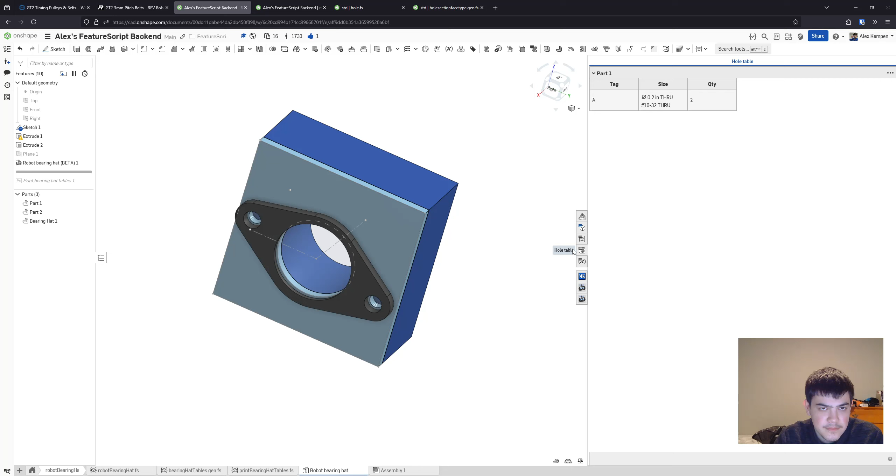Okay, let's see what's going on here. So you do have to provide both of those. Tap drill diameter isn't used. A single hole. Okay, and then let's see. So major diameter. I suspect major diameter is required just because there's bugs when you don't, but the value does not matter. And so let's test that by doing 500 times meter. Yeah, so my hole attribute is still correct, right? But then if I comment it out, no, it still works. Okay, oh, yes, there's your problem, right?

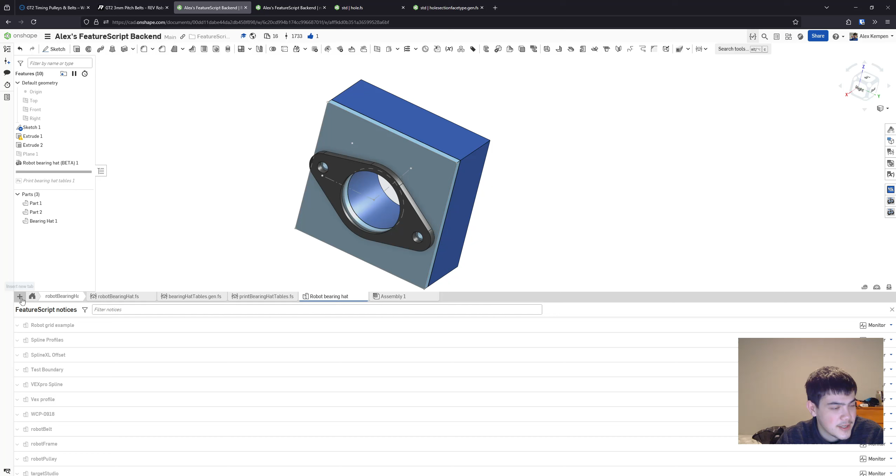So yeah, it's such a goofy, it just doesn't get used. Right. And let me verify that rigorously. How do I want to do that? I could check the underlying attribute. That's probably the easiest way. Otherwise, I was thinking about making a drawing. I'm going to just get the attribute and check. So I'm going to bring back my query checker. Get attribute definition dot my query. And then this will be undefined because we're doing the legacy named attributes because that's what hole attributes are.

All right, let me make sure actually. Set attribute. Just make sure all of the attributes in here. Interesting. Yeah, so attribute is always entities and attribute, never a name. And then they set it on different entities, it looks like. It does look like there's logic in here to handle other types. I bet for complex holes, it might mark the tip and stuff, perhaps. But because we're doing simple through all holes, it's just the simple ones, which is nice. I need another one of those on there. Okay, so let's do a little inspecting.

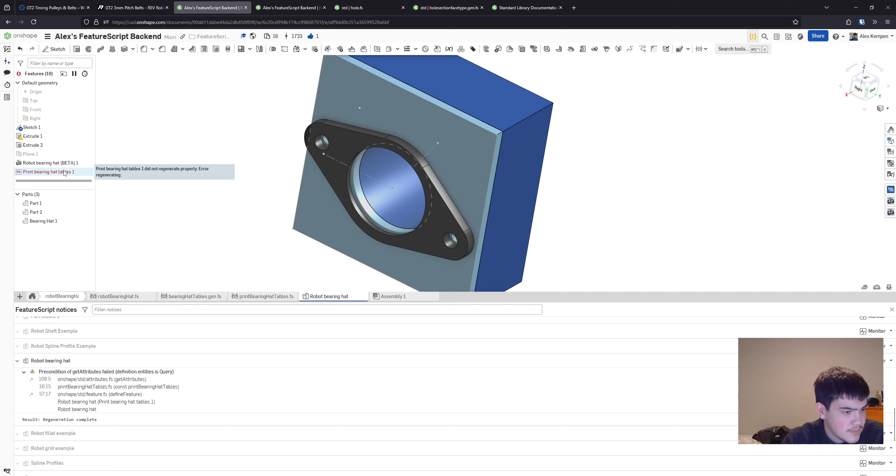Thought that wasn't a requirement. I could have sworn. Let me go check. Let's see here. Get attributes. If attribute pattern is provided. Oh, interesting. Okay, yeah, so it's get attributes, not get attribute. Funny distinction. Oh, yeah. Relax, relax, we're getting there. Okay, so I need to specify... wait, really? I don't need you. Okay, there we go.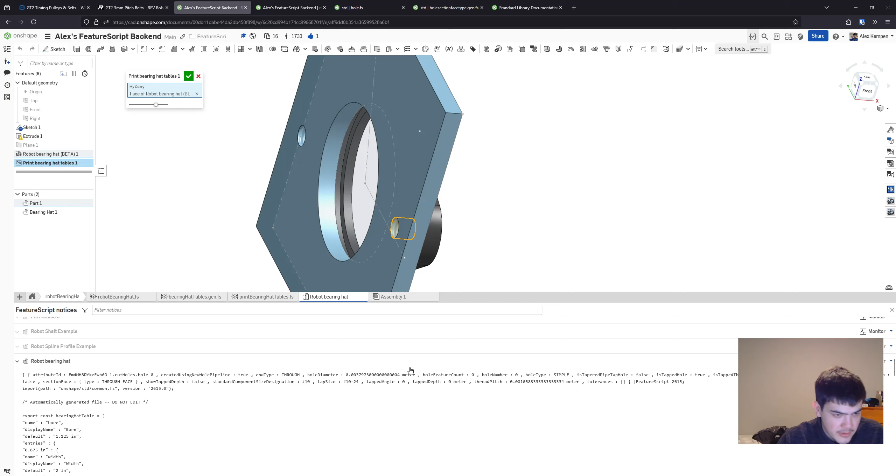Entities. Okay. Yeah, so here, hole feature count, hole number, hole type, is tapped hole, is tapped through. Oh, so major diameter is getting set. So that's fun. Tap size, tapped angle, tap depth. Yeah, okay, so with that in mind, then I will properly set it. 0.1900 times inch.

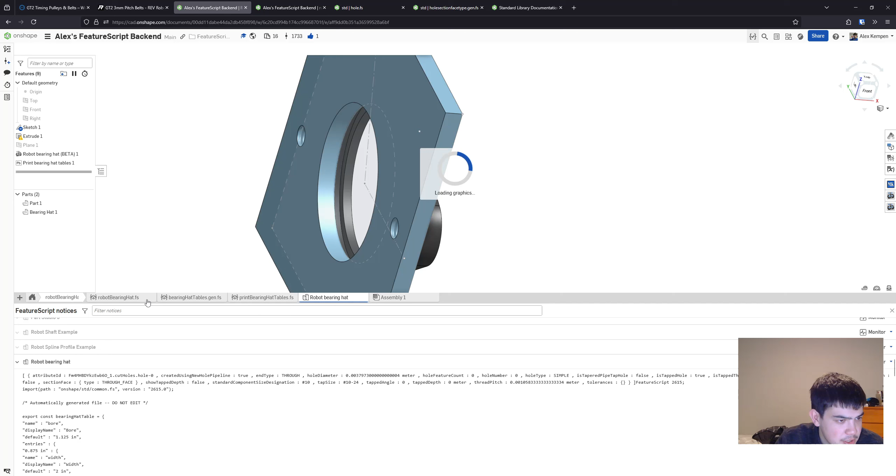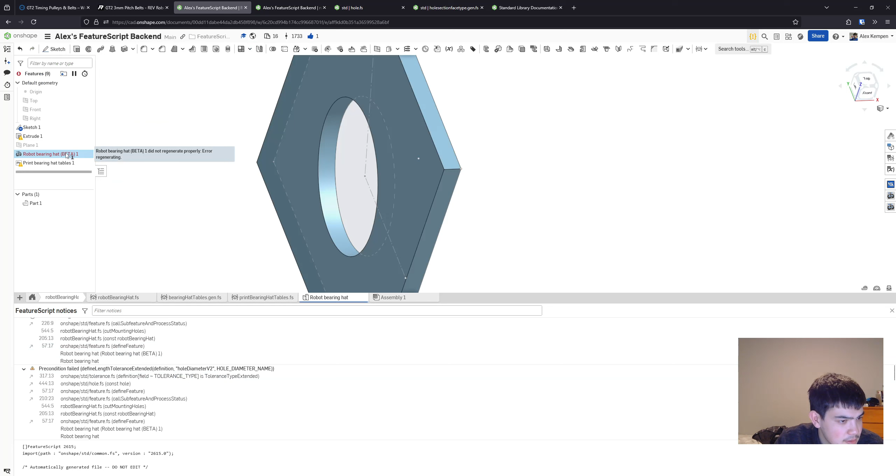And then these are all required as well, I'm pretty sure. Let's just check. Oh, maybe not. Hold on. I get the feeling the feature is about to have a bad time. Okay, one of those is required at least. Still failing, yup. Try that. Oh, it's happy. Okay, so maybe you don't need those two, I guess. Which makes sense because we're not actually tap drilling. We are pretending to tap drill, but we're not actually. So yeah, okay.

Okay, let's see if we can get away with not having a hole diameter. We can? Question mark? Okay, I don't know. Well, let's check. Hang on. Let's check if this becomes close. Okay. If we're cutting a standard 0.2. Okay. All right, that works. Interesting. Yeah, okay, so I don't need that, which is good.

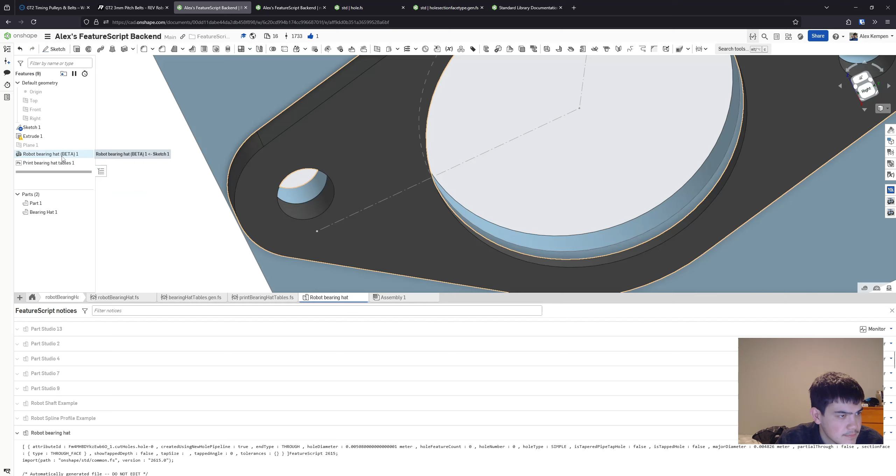That makes me happy. And I do need the major diameter, I do need the precision stuff, which is fine. I think that's reasonable. Has clearance is false is fine. Do I need that? Some of those things should default to false or true, and it should just be fine. Close, free, tapped. Okay, cool, that works.

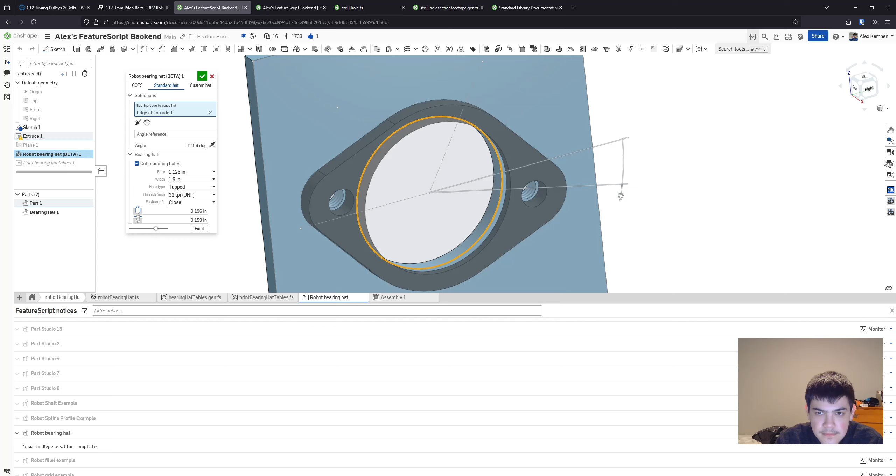Unit system? Do need a unit system. Okay, precision is, okay. All right, cool, and everything else I should need, I would imagine. Thread standard? No, don't need a thread standard. Right? Check the hole attribute. Looks pretty okay to me. Is tapped hole, is tapped through, yeah. Okay. Cool. End type? End type required. Okay.

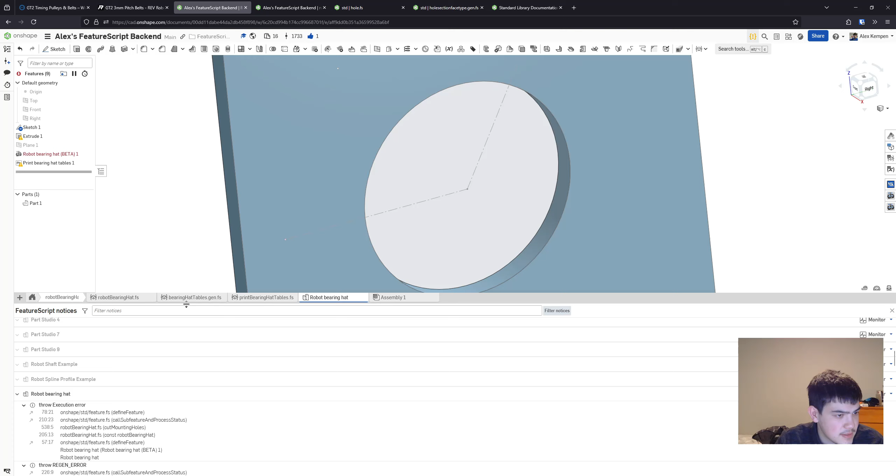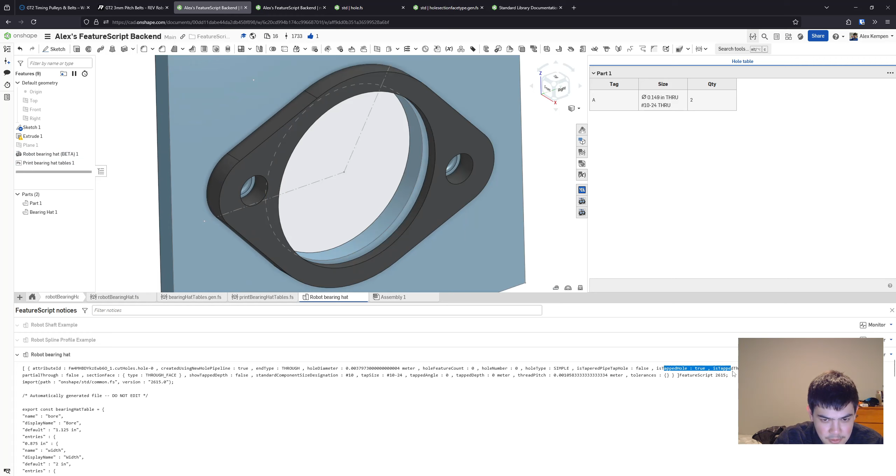Yeah. So obviously I had it working, but I like to try to be a little more minimal, because having to pass a bunch of parameters that I don't need is kind of annoying. Is tapped hole, is tapped through, so is tapped, yeah. Just open it up, make sure it's still correct. Even with like a clearance hole. Yep, okay. Because I bet some of these, oh, it does default to false actually.

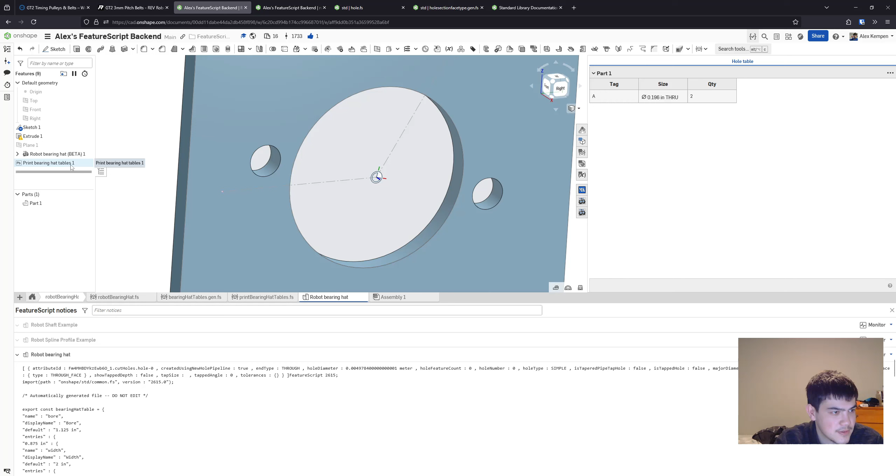But I don't know. I mean, it's clearly tapping through, so maybe it's just tapping to like a depth of a ½ inch, but then it's detecting that's the full width. So I'll leave that to true. So I'll make it a comment. That's not strictly required, but probably good to have.

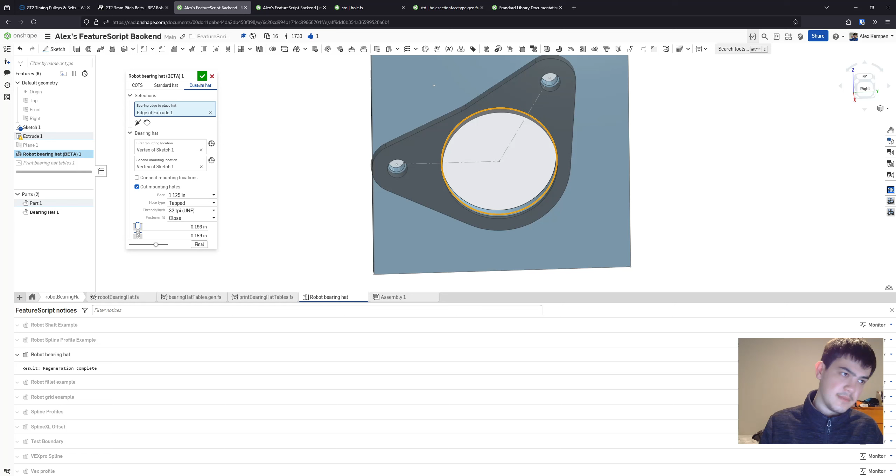Yeah. Okay, so with that, I believe that is a functional feature. It appears to do everything I want, right? This still works. Yep, angle reference, still okay. You can still give it a flip and stuff like that, so that's all good. We're happy with that. Custom hat works. You can connect the mounting locations if you want. And you can do all your hole things. So yeah, I am chuffed with that.

So last thing, I'll get rid of this then. I don't need that anymore. Probably should have just like a test feature that prints queries. I think someone actually posted one at some point as well, like Query Explorer or something like that on the forums. One of the developers. So it just does something similar. Or I guess mine does attributes, and Query Explorer is just for queries, so that's actually quite different. But yeah, so a little peek under the hood.

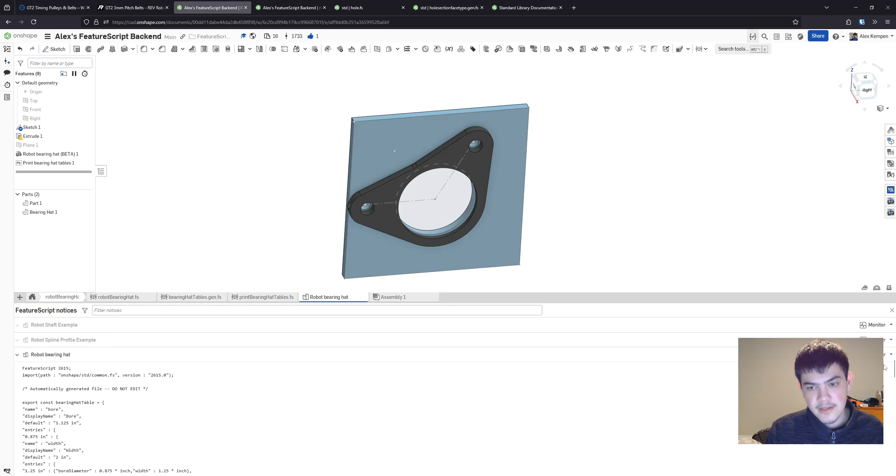So last thing I'll talk about is releases, right? So the way I do releases is I have the structure where I basically create versions in my backend document. So one thing you've probably noticed is I have all of my code together here in this document. And the reason for that is because having FeatureScript code that's shared in separate documents is incredibly cringe, in my opinion, because you have to keep going back and forth and updating imports,

because you'll be wanting to make changes to a shared function, and then you want to see those changes, so you have to push the version, create the version, and then update all the references, right? Just to see your changes, and then you realize oh, I forgot this minor thing. So now you gotta create another version, update, right? See it again. Oh, I actually did need to do that, and change it back. Create a version, update it. It's incredibly tedious, and nobody has time for that. Life's too short.

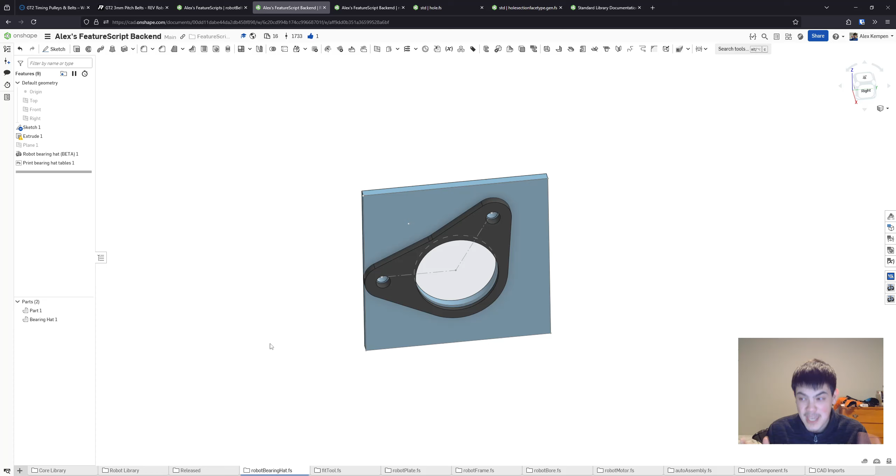The only time that would ever make sense, I would think, is if your backend is really actually maintained, and you have tests, and the interface is really well defined. It's not going to change very often or ever, right? These are my diehard utilities that I use in all of my scripts, but they also are incredibly stable and generic, and I don't ever really change them at all. So if you had something like that, maybe it could make sense, but for me, I say just have it all in one.

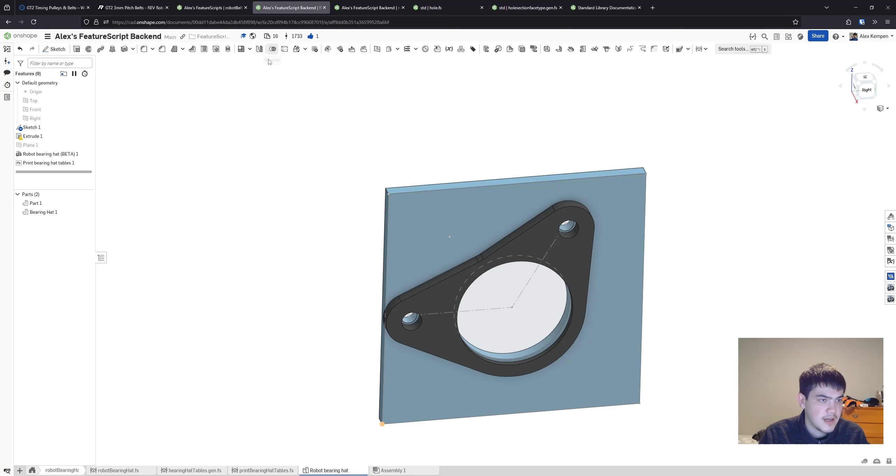And so then the problem with having it all in one is, if I start working on a new feature, or make changes, that could break any of my other scripts, right? And also from a user perspective, if anyone were to come in here and try to use scripts out of this document, I have a bunch of other random things like this utility that prints lookup tables. Obviously no user needs this, no user wants this. But if they were to start adding features, it's going to be in the list because it's a feature script. It's technically valid, and so that's confusing, right?

And then for example, when I was working on this, I made modifications to my boundary library, which is also used by my robot belt feature and some of my other features, right? And so obviously I tried to keep those up to date as I was modifying this, right?

But if I mess those up, those features are broken. And so when I release this, we have a problem.

The way I solve that problem is I have my backend and my frontend document, and I control the versions in between them. So when I want to release a script in my backend, I make a version for that script specifically. For example, here I wanted to release Robot Belt, a new version of it, so I made a version for Robot Belt specifically.

In my frontend, this is just an export import of the latest specific version of that feature script. So when I release Robot Bearing Hat, I won't update this version, because this is still pointing to the latest version of Robot Belt, and I won't update the version pointing to the latest version of Robot Pulley. Those will stay indexed to whatever version of the code I last signed off on and said this is a good working version, I'm ready to release. But Robot Bearing Hat will point to whatever latest version I create for it.